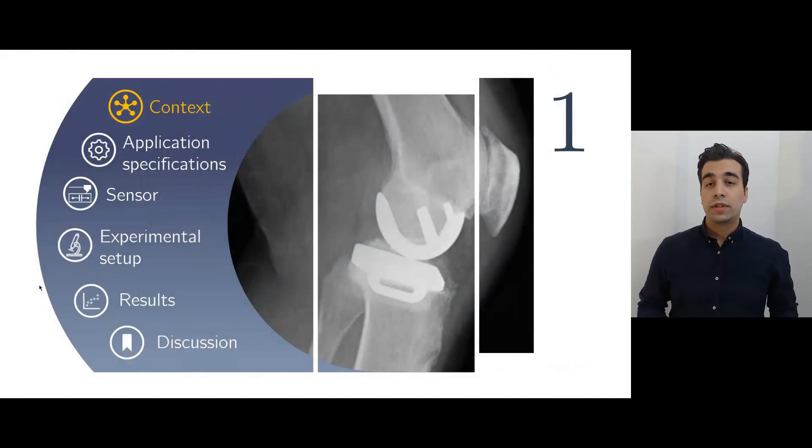My name is Dimitrios Kosmas, and on behalf of the Robotics and Mechatronics Group of the University of Twente, I will be sharing our work on the development of a 3D printed capacitive force sensor aimed to assist in a partial knee replacement surgery. First, we will have a brief introduction to the project.

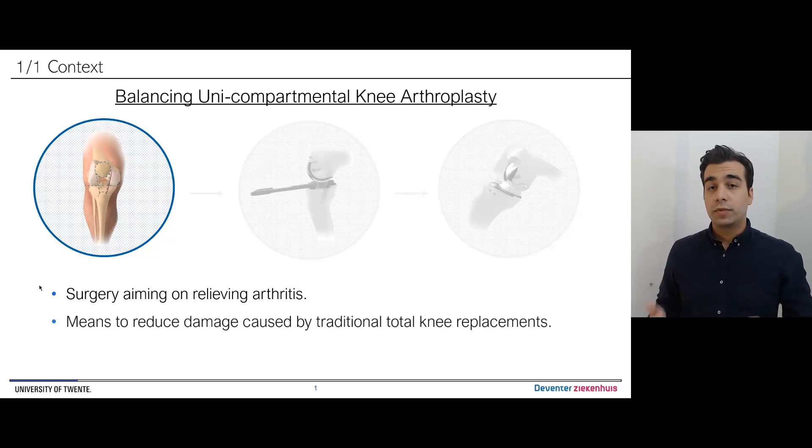The topic of balancing unicompartmental knee arthroplasty focuses on relieving symptoms of knee-related arthritis as an alternative to the more traditional total knee replacement. When applicable, the partial knee replacement incorporates smaller implants, which reduces the amount of bone required to be removed, subsequently minimizing the overall damage that is induced.

During the surgery, the orthopedist makes use of a spoon-shaped device, referred to as the gap gauge. These gauges come in various thicknesses, as a means to address the different knee sizes. The goal during this step of the surgery is to assess the distance between the tibia and the femur bones, such that the gap is equivalent in positions, flexion and extension, of the unloaded knee.

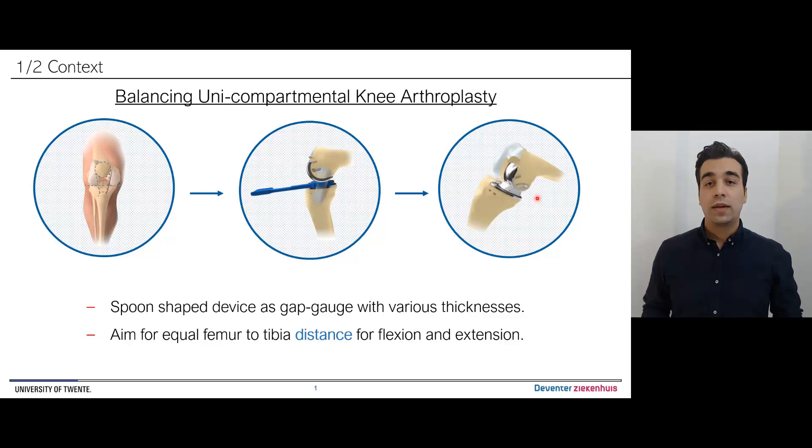Equivalent distance guarantees the proper function of the polyethylene bearing implant that is located between the metallic parts of the final prosthesis. In this work, we make use of additive manufacturing as the fabrication technology. Additive manufacturing, or 3D printing, is known for a number of key advantages, like design freedom, which enables the fabrication of complex shapes, as the one shown in this figure, representing a sculptor's recreation of a spike fossil, rapid development cycles, and, amongst others, the possibility to realize geometries with personalized features.

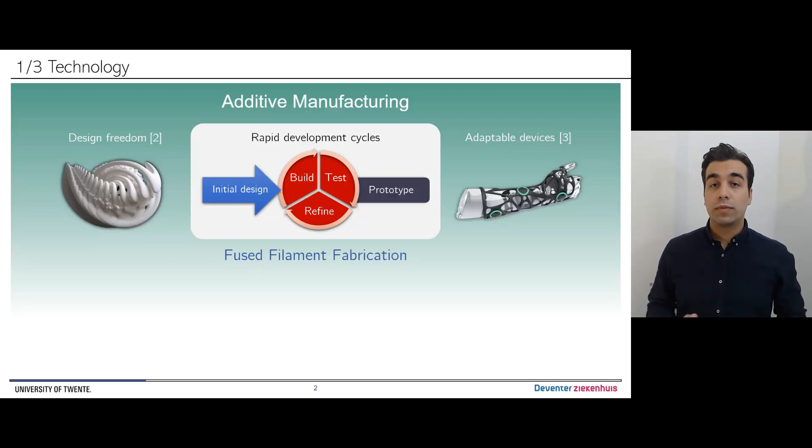In particular, out of several 3D printing fabrication technologies, we make use of fused filament fabrication, which is one of the most common and accessible methods, where molten thermoplastic is pushed through a small diameter nozzle to form objects layer by layer. When these thermoplastics are infused with carbon, they can exhibit conductive behavior, and combined with multi-material techniques, sensing can be integrated into almost any geometrical structure, like the one that we see in this figure, showing a 3D printed EMG armband, which was developed within our group.

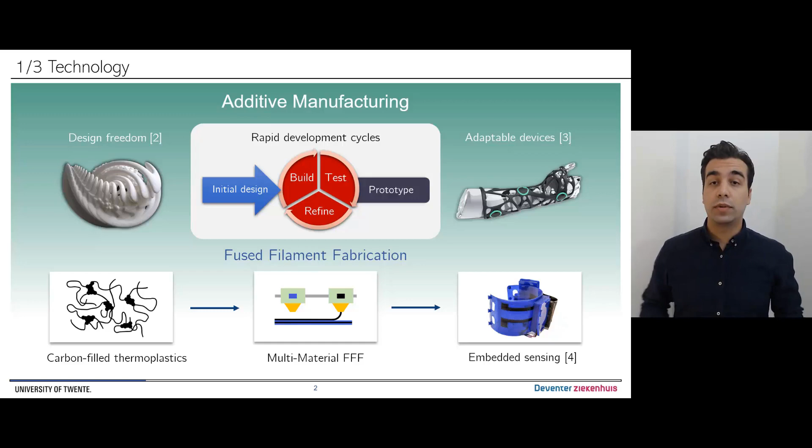The motivation behind this project is the hypothesis that for the longevity of the prosthesis, the applied force by the ligaments in both flexion and extension of the knee should be similar and within a certain range. Currently, this force is experimentally estimated by the surgeon based either on the felt friction during the gap gauge insertion or based on the reaction force when attempting to raise the gap gauge while in place.

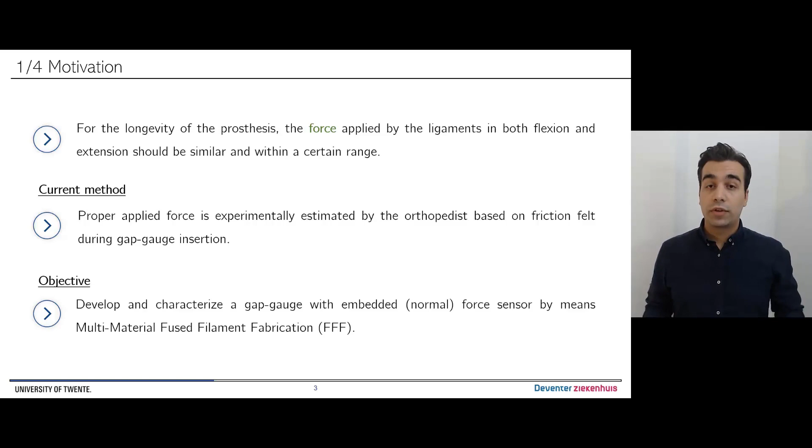Therefore, the objective of this work is to develop and characterize a gap gauge with embedded sensing in order to quantify the normal force applied by the ligaments, and we will do that by using multi-material fused filament fabrication technology.

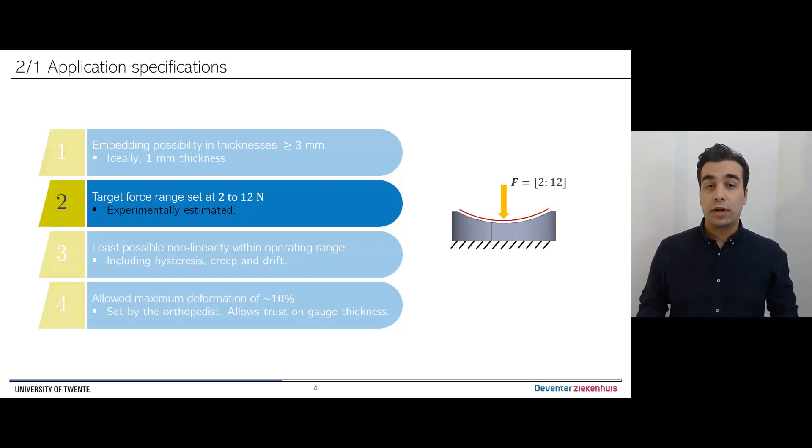With the context introduced, we first have to define the application requirements. As discussed, the gap gauges come in various thicknesses. With a proof of concept prototype in mind, we focus on thickness of 3 mm and above, as a means to ease the fabrication process. Second, the target force range to be sensed is set from 2 to 12 newtons, and this is experimentally estimated with the help of the surgeon and an artificial knee setup fitted with an off-the-shelf load cell.

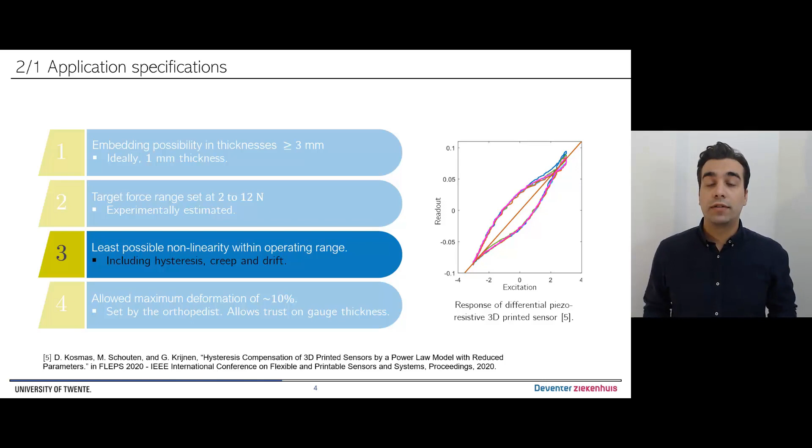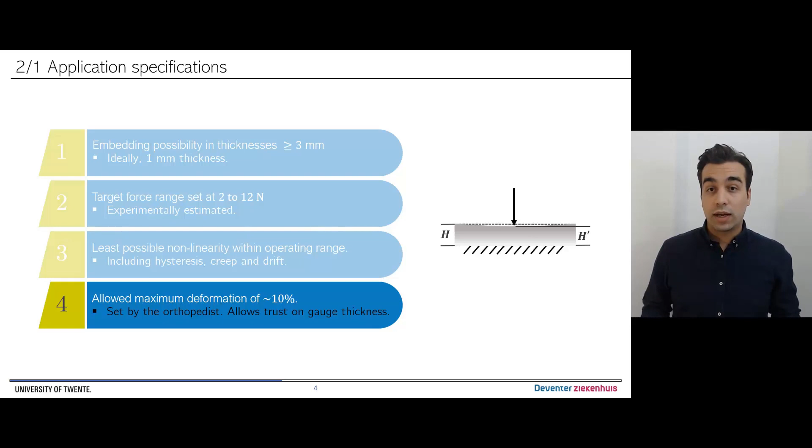Third, given the non-linearities exhibited by filament-based 3D printed sensors, we aim for a sensing principle and configuration that could eliminate most of the undesired effects, such as hysteresis, creep, and drift. And fourth and last, by integrating sensing into the spoon, we consequently allow a certain degree of deformation, such that a signal can be produced. In order to maintain trust in the gap gauge's thickness rating, and after dealing with the orthopedist, a maximum of 10% deformation is set as the allowed limit.

Next, the sensor design and fabrication will be discussed. For the sensing principle, a capacitive approach is chosen in this case. Often, a piezoresistive approach is also suitable, but from the literature it is shown that filament-based piezoresistive sensors exhibit highly nonlinear response, which would violate the set specifications. Capacitive sensing has been shown to be less influenced by the viscoelastic properties of the polymers used, and therefore exhibits less nonlinear behavior in the response.

On the other hand, capacitance readout interfaces are more complex compared to their piezoresistive counterparts. With all that in mind, a parallel plate capacitive sensor is chosen in a differential configuration with 3 plates. Here, the middle electrode acts as a common ground plane. The exerted force is designed to be normal to the sensor surface, reducing the distance between the electrodes upon application. In the cut of the sensor, in the bottom left figure, the embedded structure is exposed, where we can see the sensor body, the dielectrics, the contact pads and traces, and of course the electrodes.

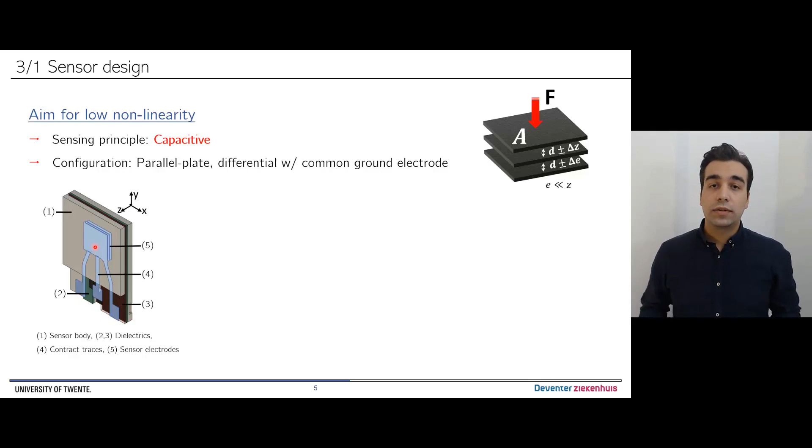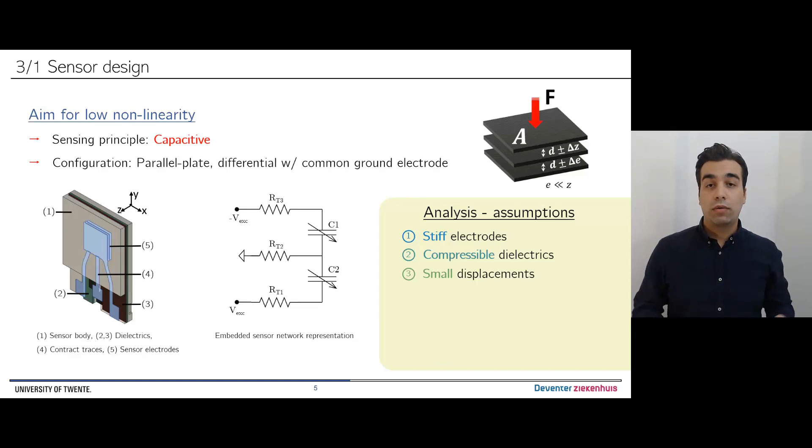In the figure in the middle, the network interface of the sensor is shown, with RT denoting the contact traces resistances. Last, by taking three assumptions, it's straightforward to derive an analytical description of the expected capacitance change. That is, assuming stiff electrodes, compressible dielectric, and very small displacements, where we allow ourselves to work on the linear range, where the capacitance change could be expressed by the following equation.

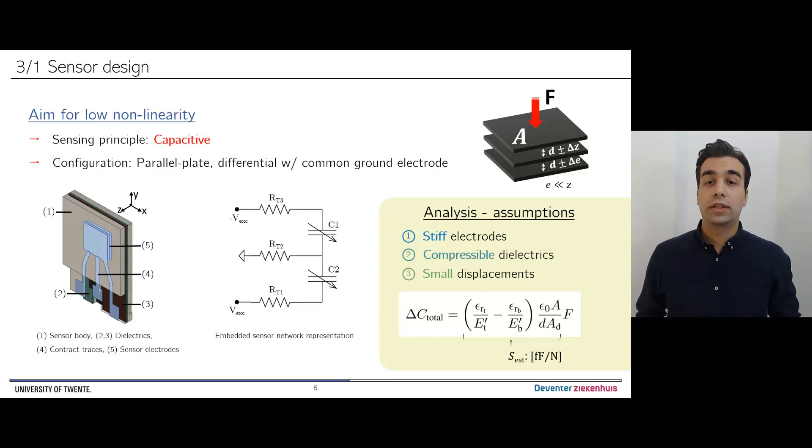From here, the fraction delta C over F can be seen as the sensor sensitivity expressed in femtofarads per newton. Moving on, we can discuss the sensor fabrication. A 4-material task is carried out in a Diabase H-series 3D printer. As illustrated, the printer operates on the basis of a rotating turret, where tools are located along its circumference.

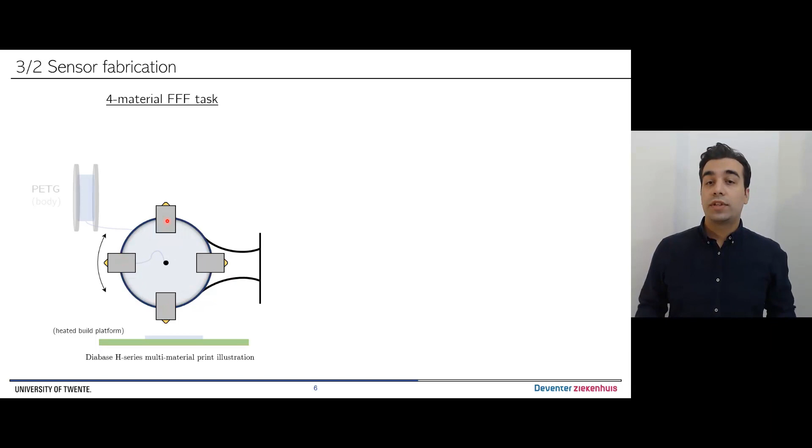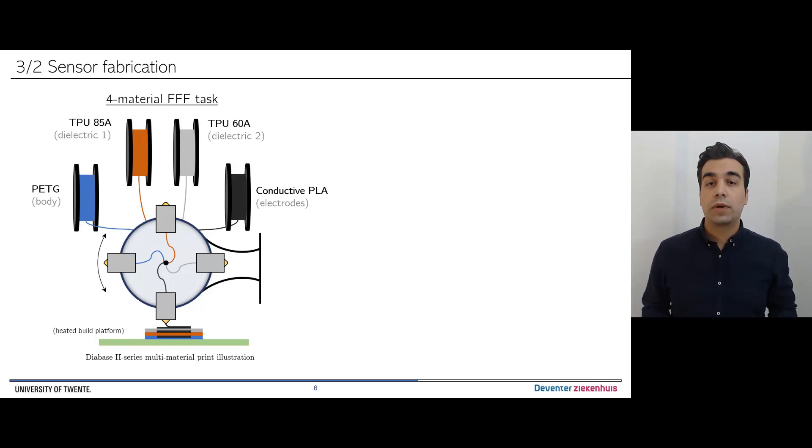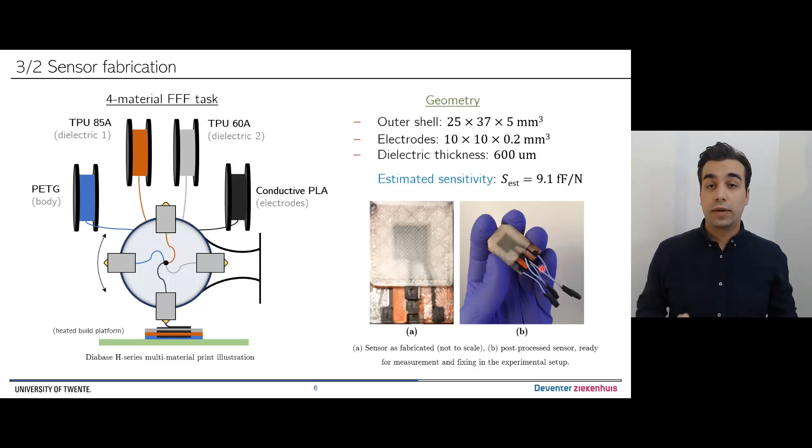In the bottom right figure, we can see the fabricated sensor, first as it was fabricated, and in the second figure with minimal post-processing, where the readout cables are attached by melting some stranded wire into the contact pads. Okay, next we'll have a short overview of the experimental setup.

The main components of the experiment are a PC equipped with MATLAB software, where readout and post-processing scripts are made, the 3D printed sensor, loaded in the normal direction with a SMAC linear actuator. On the tip of the actuator's stroke, a load cell is attached in order to more accurately measure the force. A plastic tip is then used as the contact medium with the sensor.

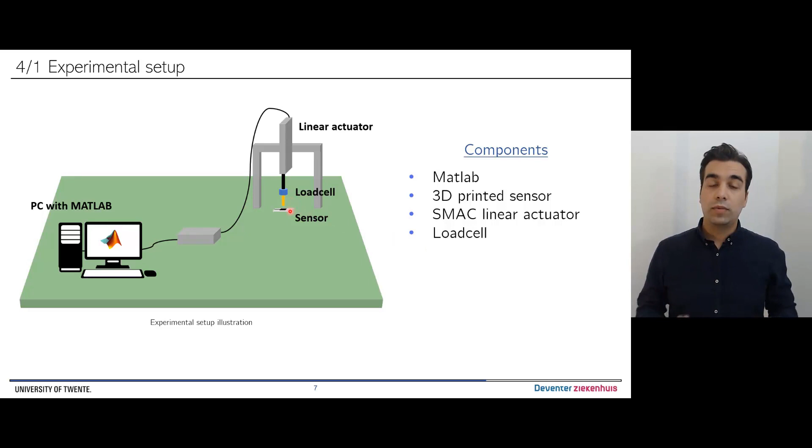To read out the sensor, an off-the-shelf capacitance to digital converter is employed, which in turn is interfaced with an 8-bit microcontroller, an Arduino Micro in this case, which streams data over to MATLAB. Then the raw actuator encoder channels are extracted and read by a digital oscilloscope as means to evaluate the stroke position. Last, the force signal is read by all measuring devices.

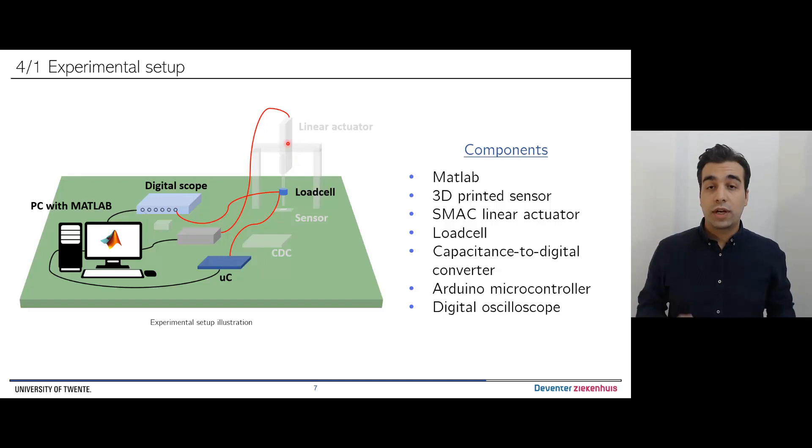The response of the load cell is fed both into the scope and the Arduino, and the force as returned from the SMAC controller is also read by MATLAB. During post-processing, the sampled force from all the devices is used to synchronize all signals in respect to each other. With the setup described, we can now move on to the results. For this work, the sensor is characterized under dynamic loading condition. A sine wave is used at a 0.2 Hz frequency with an amplitude of 10 newtons.

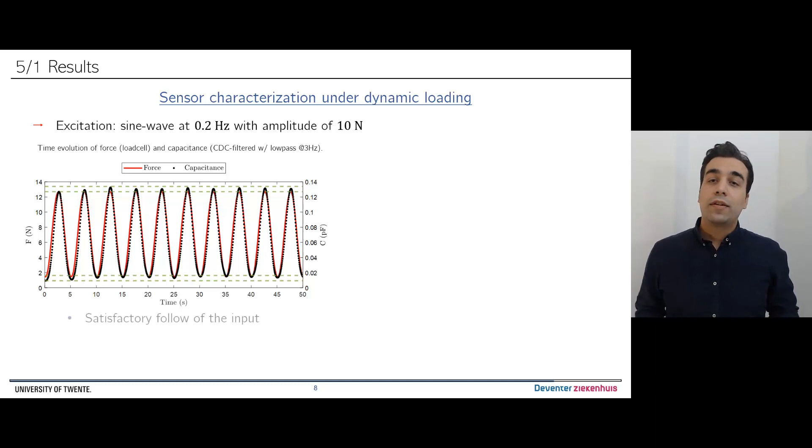The first figure describes the filtered capacitance response versus time in contrast to the exerted force input. At first sight, we see a satisfactory follow of the input, although the extrema response is varying in an unpredictable manner within a certain interval. From this data, the measured sensitivity is found to be 9.5 femtofarad per newton, which falls quite close to the estimated one of 9.1 femtofarad per newton.

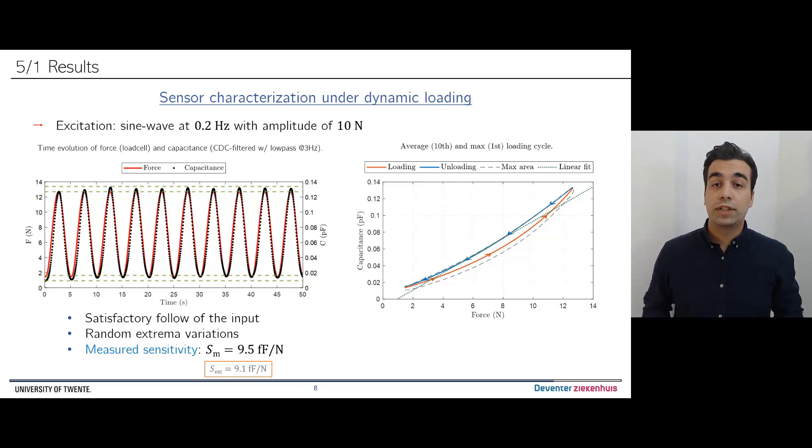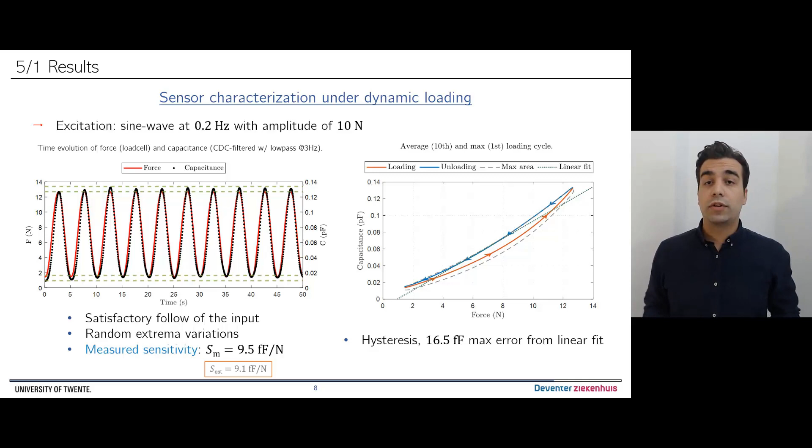The figure at the right shows the input-output relationship of the cyclic loading, clearly exposing the hysteresis of the system. Here, a max error of 16.5 femtofarads from a linear fit shows a significant drop in accuracy when continuous measurements are concerned. Now we can conclude with a short discussion. First, we saw a good correspondence between the design and measured sensitivity.

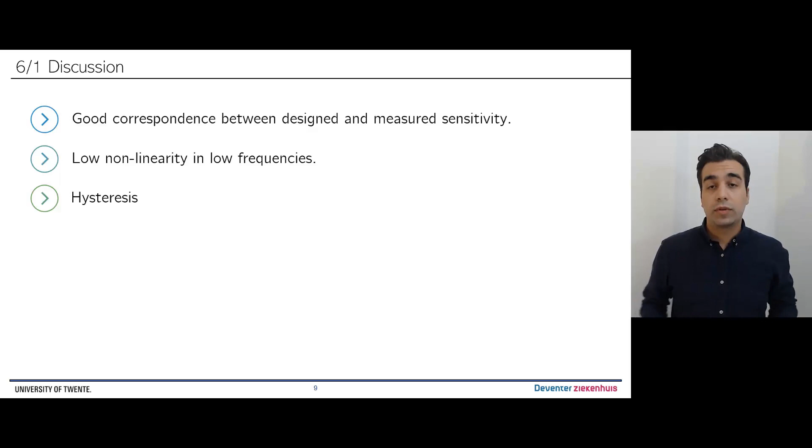Second, for low frequencies below 0.2 Hz, and by focusing on the loading part, the sensor exhibits relatively low non-linearity when compared with other filament-based approaches from the literature. Hysteresis is still present and significantly reduces the sensor performance. So if repetitive measurements are of interest, then methods of hysteresis compensation are advised. Fourth, overall, given the application specifications, the prototype sensor seems to be potentially suitable for the task.

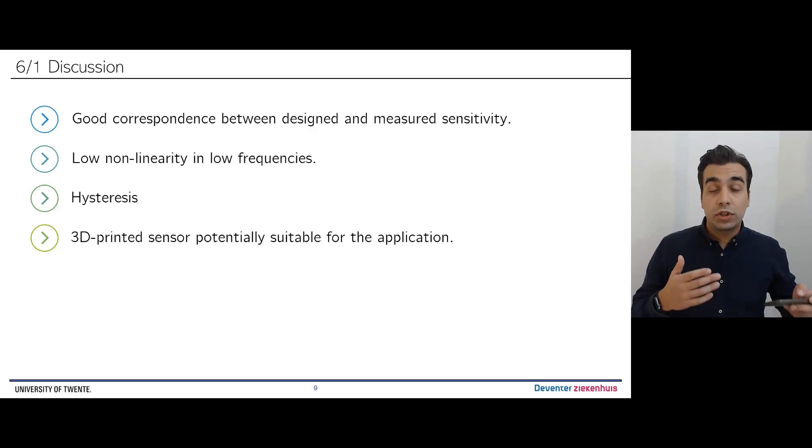Towards future work, we will focus on application-specific characterization by means of testing under static loading conditions, investigating the effects of embedded active shielding, as well as examining possible sterilization methods, compatible with filament fabricated devices, of course.